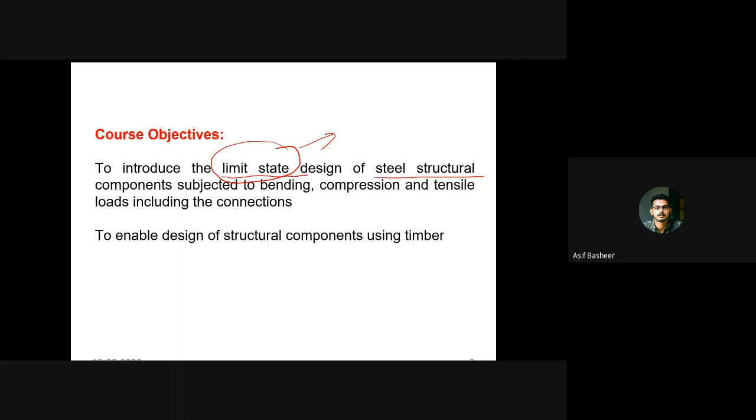So the course objective is to introduce the limit state design of steel structures. You have studied what is limit state, right? We have studied this before in the case of concrete structures. Do you remember that? As per IS 456:2000, we had done the limit state design of concrete structures, isn't it?

So here we are starting the design of steel structures. The same limit state design we are doing here for designing the structure in bending, compression, and tensile loads - to take the bending stress, compressive stress, and tensile load coming on the structure - as well as we are designing the timber structure.

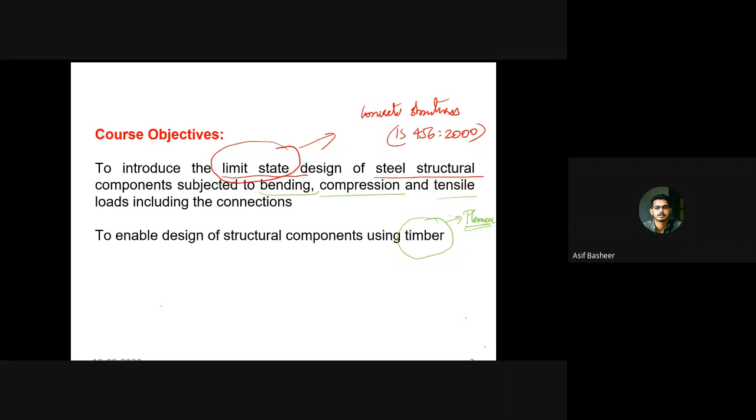For designing the timber structure, we will be designing mainly for flexure only - that is, we will design only the timber beam, and a single problem from column or something will be there. So in your syllabus...

TOS 5 consists of mainly two parts - design of steel structures, as well as design of timber structures. Your four modules will be design of steel structures, and two modules will be design of timber structures. So that constitutes your TOS 5, that is Theory of Structures 5.

A brief introduction to the syllabus: design of steel structures has four modules - module 1, 2, 3, and 4. In that, the first module is the introduction to steel structure.

Whatever things we are going to study - what is the need of this design of steel structure, what is the relevance or use of studying this subject - you will study in this introduction part, along with the material properties used in steel design, and a small numerical type that is the design of welded and bolted connection.

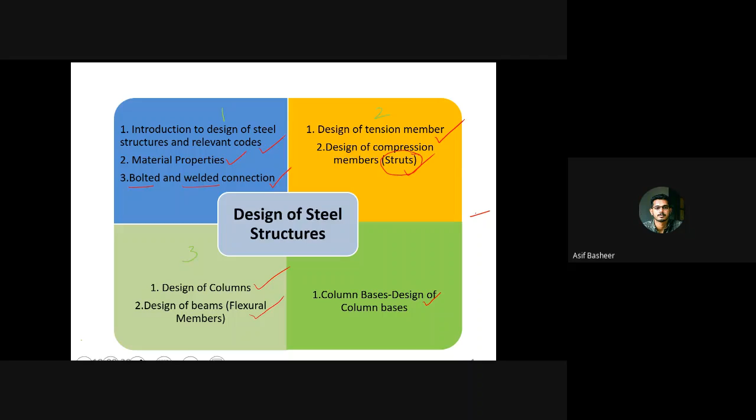The design of timber structures has an introduction similar to what you have seen in steel. You have the introduction to timber structures, then design of timber beams. The last and final module has the design of flitched beams, that is a composite section comprising both steel and timber, and a small portion on design of timber columns. This constitutes your Theory of Structures 5, and I hope it will be easy for you, and I hope you cooperate with me throughout this entire semester.

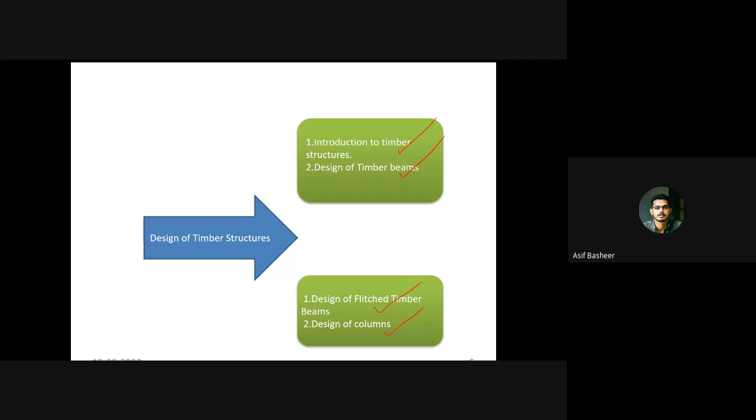Okay, now we'll move to the design of steel structures. We will start with the design of steel structures.

Have you seen steel structures anywhere? Yes. Can you tell me someone, where? In our own department. Which department have you seen steel structure in? In your architecture department, right? Yes, the renovated portion, the new extended portion, right? Yes, yes. Other place in the college, have you seen steel structure? In the auditorium. Very good, in the auditorium you have seen the steel structure.

There you have used pre-engineered structures. They have made the section using plate. Actually it's not hot rolled, it is a plate section. According to the need, we have casted the structure.

Have you seen steel structures in railway stations? There are many from Kannur, Kozhikode, Kochi. So you have traveled a lot in trains, right? The majority of major construction inside the station, the platform, the overhead bridges, many things are made up of steel only. Have you noticed that? Yes sir, many are traveling in trains a lot of times, so you might have noticed. If you haven't noticed, please do see, whatever things we are studying in design of steel structures, you can see in the railway station.

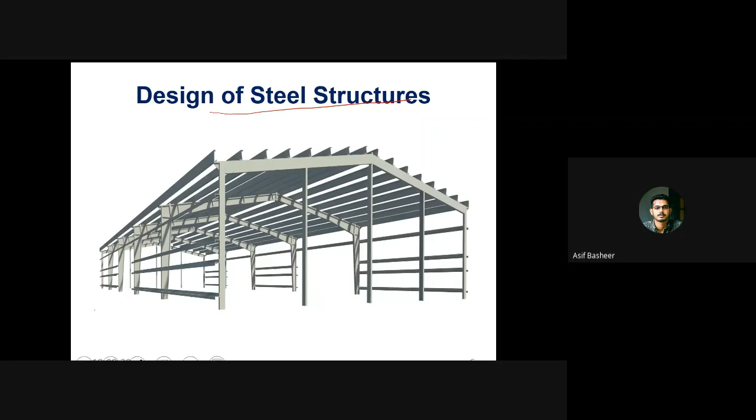That is the different codes you require for design of steel structures. Last time we had IS 456-2000. Here you are having IS 800-2007, that is the General Construction Steel Code of Practice, the steel code, IS 800-2007.

Along with that you require a thing called a steel table. That is, the different types of sections available in the market will be given by a steel table, or there is another given by IS code itself, SP 6, that is Special Publication 6, corresponding to IS 800-2007. I'll give you the PDF of these three. This will be very much useful while we are doing the numericals and all.

Major things regarding the design of the section will be provided by IS 800-2007, and for reference, for taking the different section properties, you can refer the steel table.

The PDF soft copy of this I'll give you, in the Google Classroom as well as in your ET Labs. Either you can take the printout or have the soft copy with you, but any one of this should be readily available with you. I recommend you take the hard copy, because you need to take this to your examination hall. Anyway you need to take it at some point, so take it now itself if possible. It will be easy for you to study.

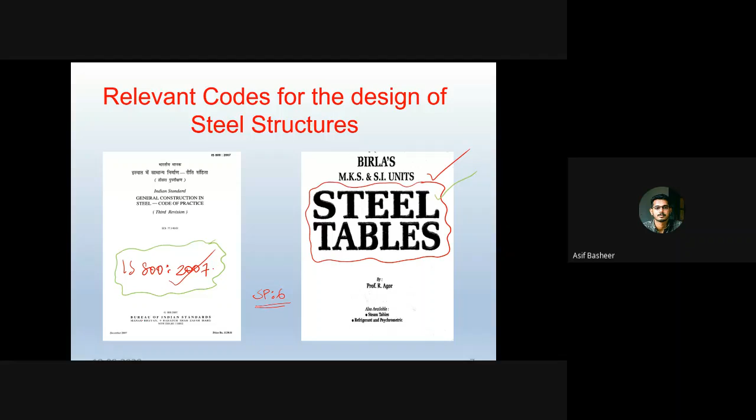And now next is, what are steel structures? So what do you mean by steel structure? Last time what we have studied was RCC. The load transfer takes place through what? The load which you are standing, suppose you are standing on a slab. The load from the slab will transfer to your beams. From there, it will transfer to your columns. From the columns, it will get transferred to your footing. From the footing, it will get transferred to your soil structure, or the base of your structure, isn't it? This is how the load transfer takes place, right?

So there, it was all made of concrete. Now, what is this? We are replacing these things with steel. That is, the load transfer takes place through steel elements or such structural steel. The load transfer takes place through structural steel, and the load bearing thing will be a steel structure. Then such structures are called as steel structure. That is, in steel structure, a structural steel is the main load carrying material to transfer the load within them and to transfer the load to the ground.

Last time we have studied RCC. There the load transfer took place through what? It took place entirely through your RC members, that is a reinforced concrete member. Here, what you are going to see is the load transfer will be taking place through steel sections. So can you tell me what is the difference between the steel section here and this reinforcing steel used there? Is it same?

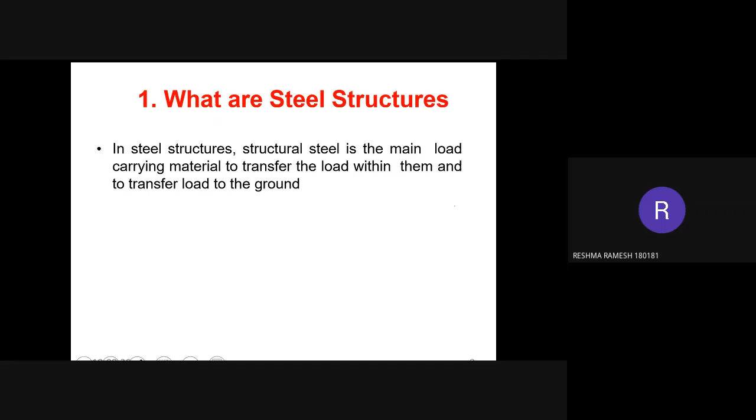No, sir. The other one is no. The other ones were just steel rods. So the difference is that are called as reinforcing bars or rebars, and here the elements or the things what we are dealing with are called as structural steel. See the word structural steel. It is called as structural steel.

They itself will be taking the entire load. The other one is just reinforcing, that is adding strength to your member. It's only the part. It alone cannot take the whole load. It just adds the strength to your structure. It's just reinforcing your elements. Reinforcing means just adding some extra property to your elements. That alone cannot take the load. But here, this element, that is a structural steel, alone can take or withstand the load, type of load which is coming on it. Either it is compressive, or it is flexural, or it is tensile. Whatever be, it alone can take the entire load. So don't get confused with reinforcing bar and structural steel. It's entirely different. The properties also are different.

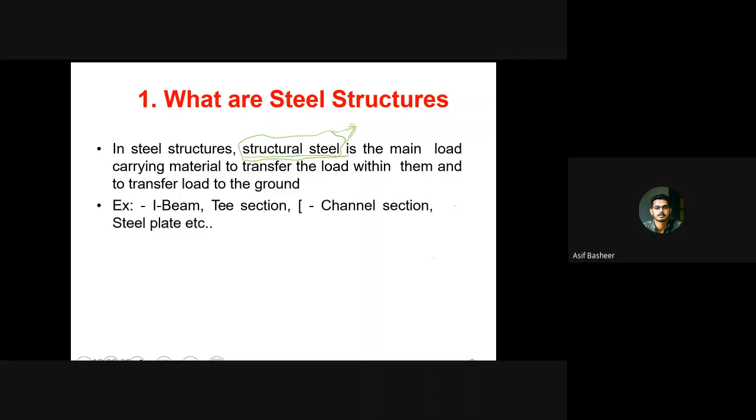Have you seen the structural steel sections? I section. That is I section. You can see I section. This is the I section. That is based on the cross section. Based on the cross section of the elements there are different sections available in structural steel. That is I beam. You can see the I section, I beam.

Then T section. See here the cross section, here the cross section is in the form. Can you see this? The cross section is in the form of the T. Can you see this? Yes, sir. Yes. The cross section is in the form of a T section. So that section is called as a T section. Then there is channel section. See this here, the section is in the form of a C, right? The section, the cross section of the element is in the form of a C. That is called as a channel section.

Then there are steel plates. Solid plates are there. It is simply like a steel plate which will carry. There will be solid plate there. Such sections are available. Okay, these are just few sections. There are different lot of sections in steel structure, and I will tell you what are the use of this I section, what are the use of this channel section, what are the use of this T section, etc.

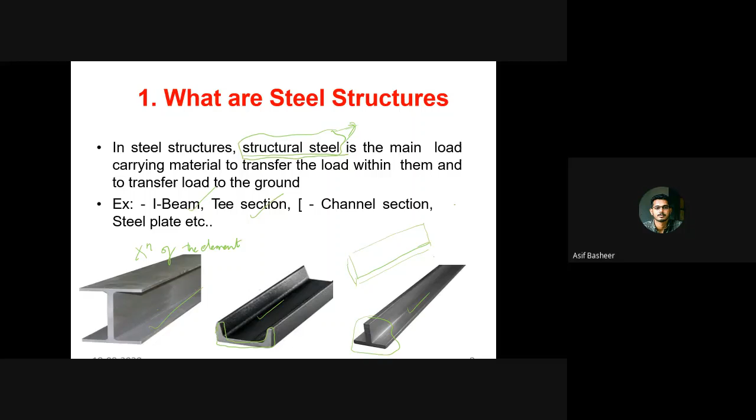Is Mohammed Sain present? Yes sir. Have you seen the same? While traveling through the National Highway, have you seen the Bismi Electricals buildings in Kochi and around? Have you seen that along the National Highway? Yes. Major buildings of those Bismi Electricals are made of these things, that is, they are made of structural steel. I will tell you why they have done that, the advantages of steel.

So sir, there are structures which have both steel and concrete, but our study in this semester will be entirely steel structure alone. There will not be steel-concrete composite structure. Just for information, I told you there are two types of structures, actually three types: steel alone, concrete alone, as well as steel and concrete composite structure.

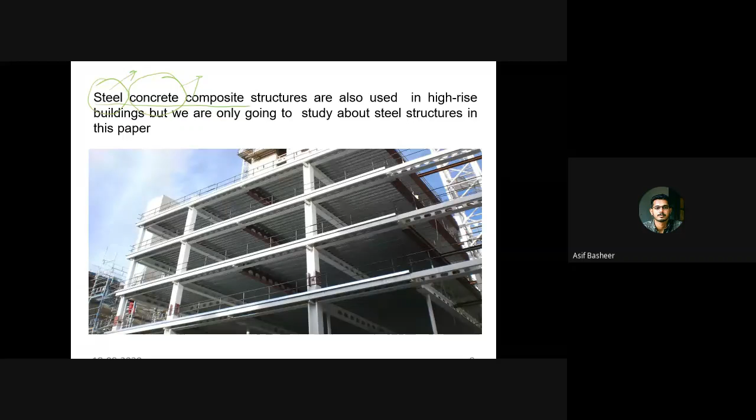Now the common steel structures used: we have seen this in factories, the steel structure used in warehouses, different factories. We are also using steel structure in cinema halls. Why are we using steel structure in cinema halls? Can you tell me?

Is Fatima there? Can you tell me why we use steel structure in cinema halls? Yes sir, maybe for acoustic purpose. Acoustic purpose, okay, that's not exactly it.

Okay, thank you. Have you ever noticed the span of a cinema hall? It will be very large, right? You need to accommodate a large span. In order to avoid columns, if you place a column in between, there will be a view obstruction. The one sitting in the balcony or in between cannot see the screen perfectly. The same happens for an auditorium also, they cannot watch what is happening on the stage. So in order to have a larger span, we go for steel structures, because steel has much higher strength than what?

Concrete. Excuse me, can I ask you one thing? Is there any restriction from my side, any distraction from my side? Students, please respond. No sir. Is there any TV sound? No sir, no, fine. Okay, fine.

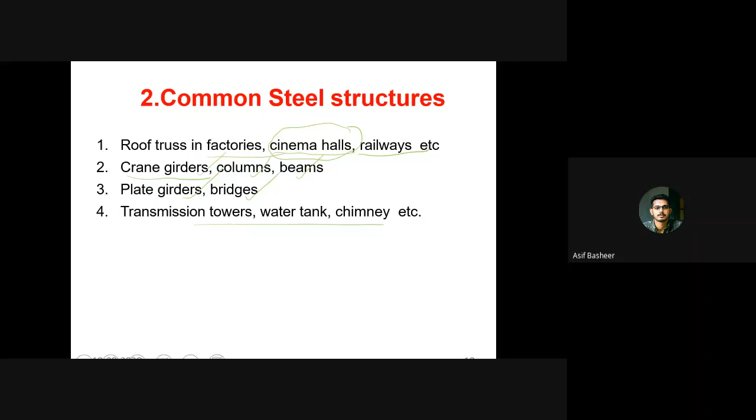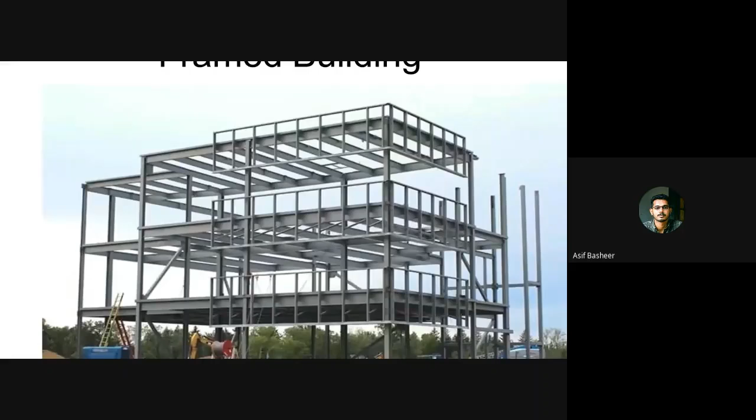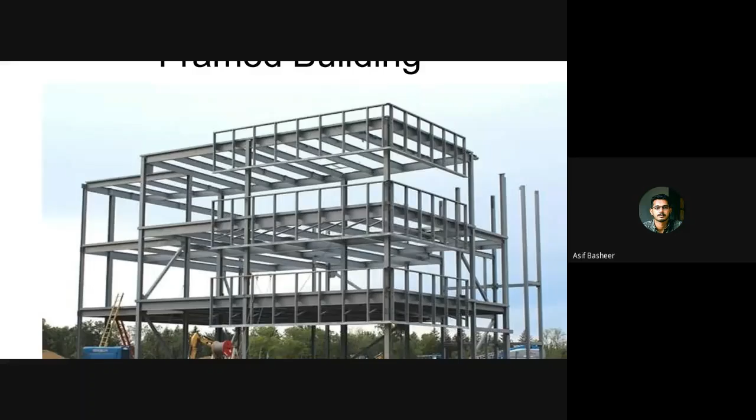So the framed buildings, you might have seen this one, right? Have you seen this frame building? This is at the time of construction. You can see the frame building coming like this.

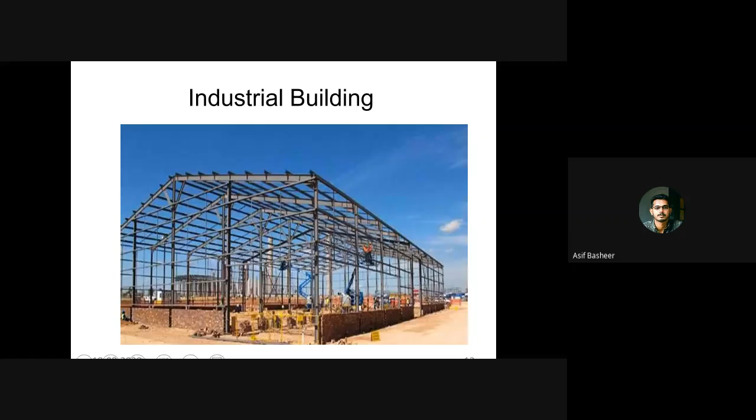The next one is industrial building. Have you seen this kind of construction? Your factories, warehouses, etc. will be constructed with the help of this steel structure. That's what we have studied. See, you can see here your auditorium - the example is your auditorium.

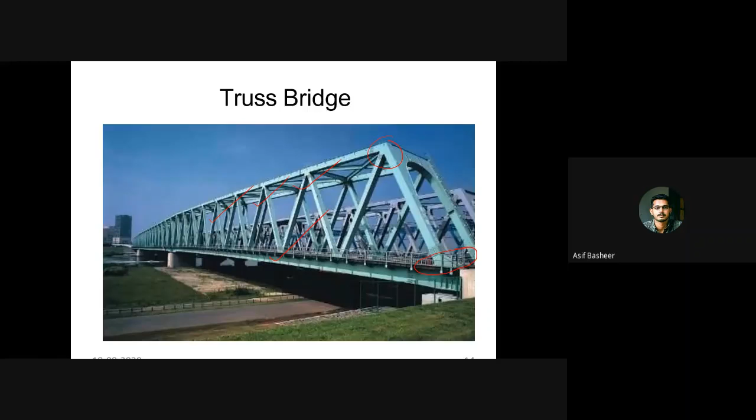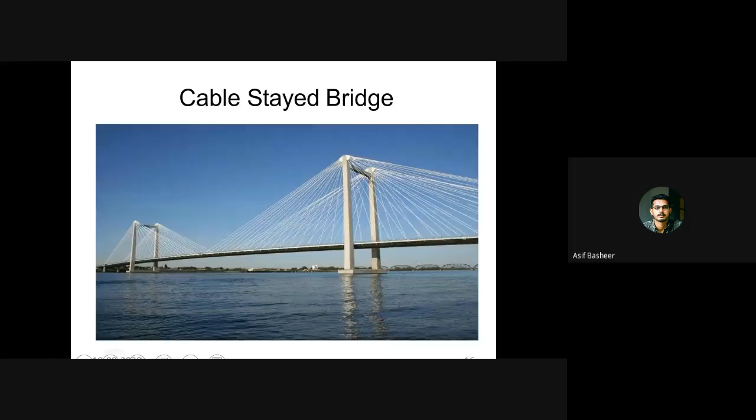And the suspension bridges also, the major thing will be steel structure only. Then cable stayed bridges. Now comes the question of why you are preferring steel structure - that is the advantages of steel structure. That will be explained here.

First one, can you tell me why you are preferring steel structure? Can someone tell me why? It can take tensile force - only tensile force.

Easy to construct, different sections are available, lightweight sections available. It's also lightweight and it consumes less space. Very good - less space. We could also span large areas.

Okay, so we'll see one by one. High strength and stiffness - it will be having high strength when compared to concrete, as well as stiffness. What is stiffness? If I'm applying some load, the load required for unit deflection, that is called stiffness, and that will be very much high when compared to other construction materials. As a result, we prefer the steel section.

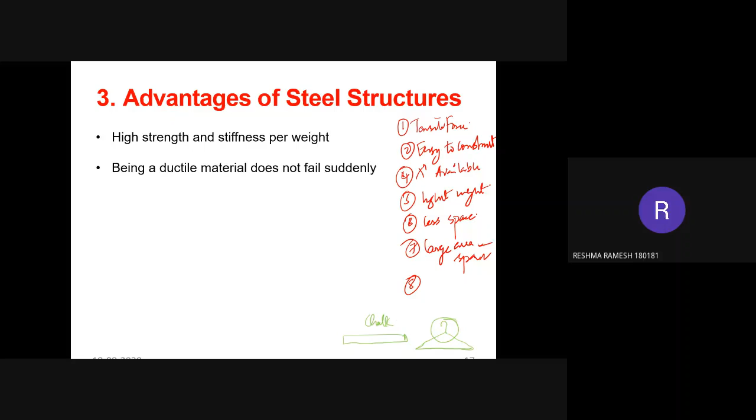What is the advantage of a brittle failure and a ductile failure? We could know, we could at least take some measures prior to the failure. Prior to the failure, either you can do the retrofitting, you can do the damage repair, or you can do anything. Like if there is an earthquake, you have enough time to escape from the building before the complete collapse of the structure takes place.

But in case of a brittle structure, what will happen? There will be a sudden failure. So try to avoid the brittle failure in structures, because ultimately it is the lives of a human being. It's the major thing when we are constructing or designing a building. The ultimate aim is that it should not harm the living beings or animals living inside, right?

So the ultimate thing is to avoid constructing with brittle failure materials. So the advantage of steel is that it is a highly ductile material, and as a result, it is largely preferred for construction. Okay, now mass production.

Mass production means what? It is definitely that concrete is being casted at the site, right? So there are limitations because the amount that can be casted at the site is limited. Very much higher workers are required, laborers are required, many limitations are there, depending on the space available at the site. Different limitations are there in case of what?

In case of concrete. But in case of steel, what is happening? It is actually factory made, right? The sections are made in the factory, which means it can be worked 24/7. There will be a lot of machines, enough space for storing materials, enough quality control, many things will be there. So it is easy to have mass production, as well as fast and easy erection and installation.

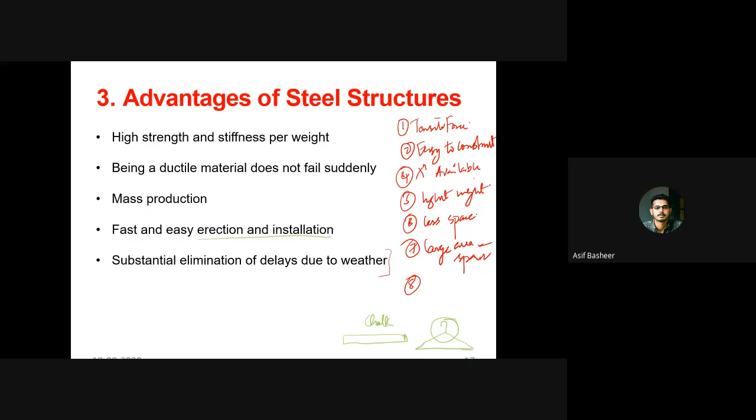The next advantage is substantial elimination of delays due to weather. In concrete structures, rain or snowfall prevents construction since the concrete can get immersed in water. But in steel structures, especially with bolted connections, there is no problem with weather. Such delays due to weather can be avoided entirely in steel structures.

Next, steel is termite proof and rot proof, meaning there won't be any attack from termites or rot. This is also an advantage of using steel structures.

Then there is uniform quality. Since steel is factory made, there will be uniform quality throughout the section, which cannot be assured in concrete structures because they are cast on site. It depends on the mindset and physical behavior of the labor, and on the material being used at the site, which might vary. But since steel structures are factory made, you can assure larger quality control and uniform quality throughout.

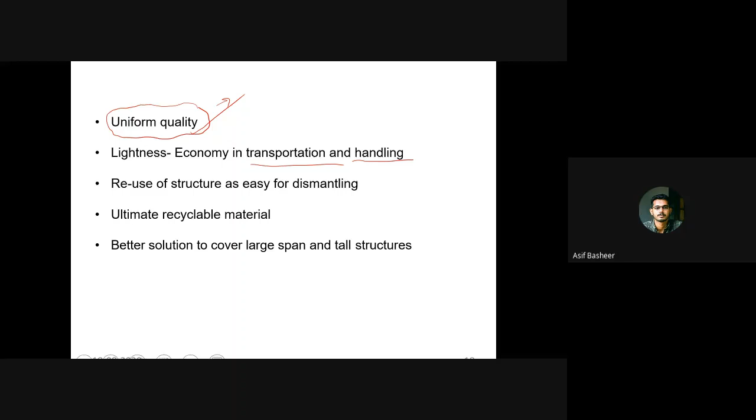Then lightness and economy. Steel is lightweight, which gives economy in transportation. Its lightness and smaller size make it easy for transportation, handling, and construction, and requires less space.

Then there is reuse of the structure. If it is a bolted structure, especially for temporary construction, reuse is very easy in steel structures, and it's easy to dismantle. In concrete, you need to destruct it, so there is no reusing of the structure.

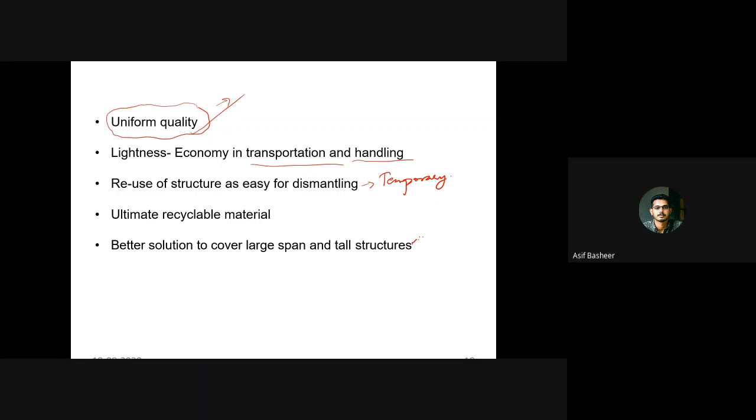Then it is a recyclable material. If properly taken care of, steel is highly recyclable. You can shift it from one place to another; it is reusable and there is no problem in that.

Then it is a better solution to cover large areas and tall structures. It is very easy to cover large span areas, like in cinema halls, auditoriums, etc.

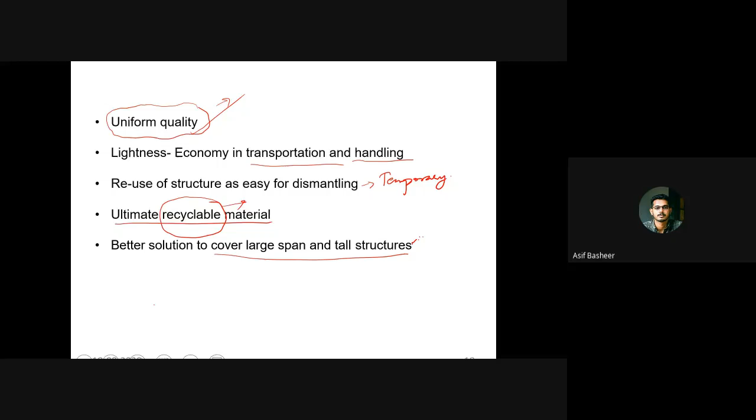Definitely there will be some disadvantages also, but the major thing is the advantage. But in Kerala and in India, we see very much less amount of steel structures. Have you ever thought of that? Recently there are many steel structures, but around 5 to 10 years back, there were not much steel structures seen in Kerala or India. Have you ever thought of that? What is the reason for that? Can someone tell what is the reason for that?

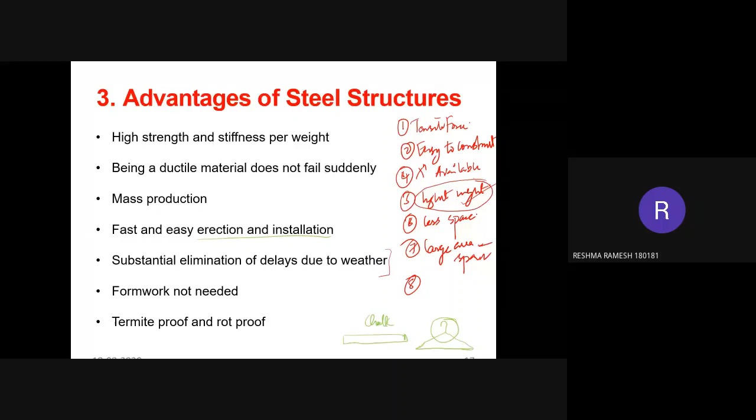Maybe the production was not that much earlier. But production is there - there is Tata, there is Jindal, there is Vizag, many are producing this steel. That is also one thing though - after 2020 they started production of structural steel. If there is no use, then there is no need of production, right? That happened in case of structural steel. I am asking why there was no use.

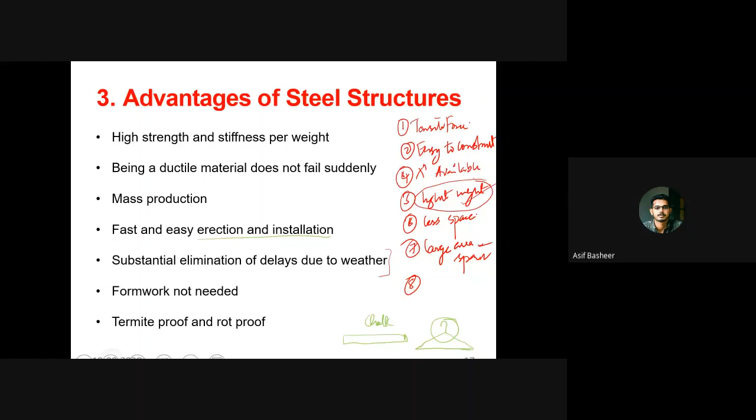So here comes the disadvantage of the steel structure: it's open to corrosion. Have you seen the buildings, structures, vehicles near your seashore? Have you noticed what's happening there? It is prone to corrosion, right? There is rusting of the structure. If not properly maintained, the structure is very much prone to corrosion.

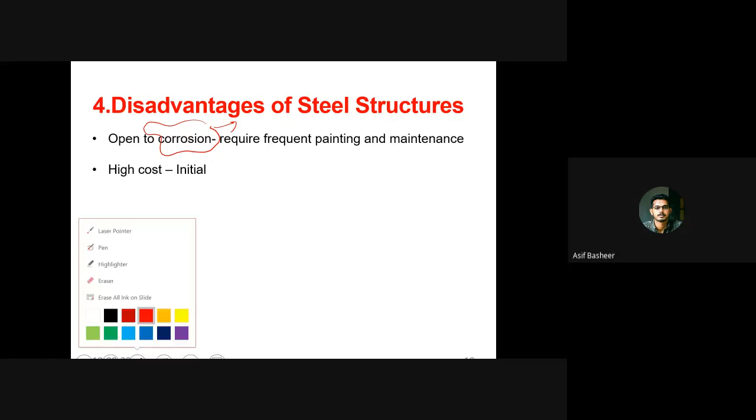The next disadvantage is high initial cost. In India, there is less use of steel structures because the initial cost is very high. It is very difficult, as an architect, to make clients understand that although the initial cost will be high, it will be aesthetically very good and will save a lot of energy like light, electricity, and many other things. But convincing them is very difficult. Nowadays it's a bit easier, but still convincing them is difficult.

This happened a few years back in India—it was the initial cost that made many not use steel structures. When planning new construction, if the initial cost is very high, they would simply reject it due to cost. But nowadays they reason that even though the initial cost is high, the revenue generated will be much higher compared to the initial cost, so they go straight with steel structures. There are many advantages to steel structures.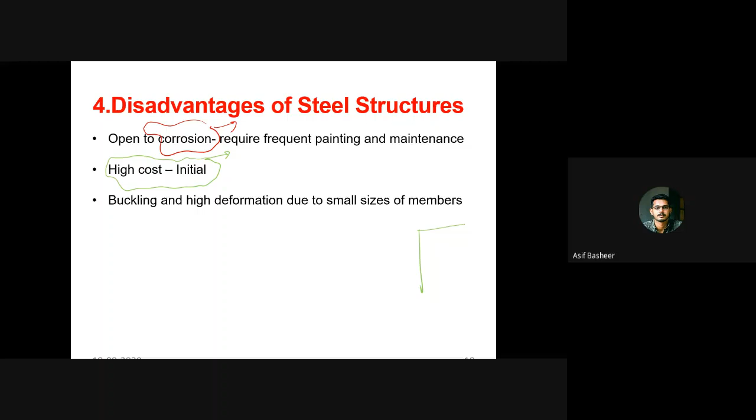Next is buckling and high deformation due to the small size of members. As the thickness of members decreases, what happens? Suppose you have a column made of concrete, and a similar column made of steel. This concrete column has a tendency to fail by crushing.

But here, besides crushing, there is a tendency for the steel column to buckle—this is called buckling of the column. Thin members, rather than crushing, have a tendency to buckle. If you're using small members, there is a high chance of buckling and high deformation—this deformation is called delta. There's a high chance for deformation to occur, which is why we try to avoid it.

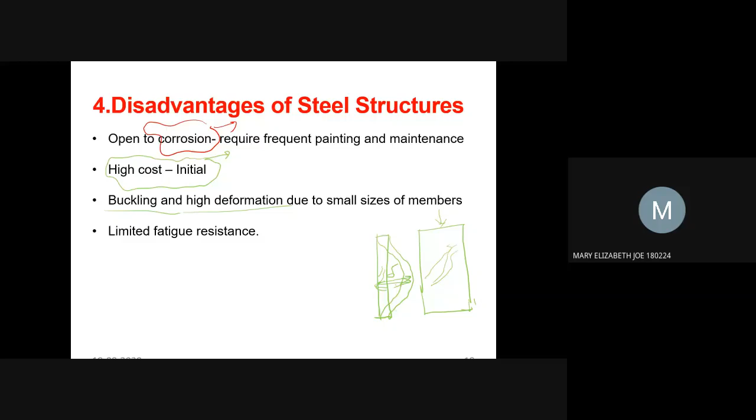A student asked: Sir, despite this buckling problem, in Western countries almost all high-rise buildings use steel, right? So why don't they have this problem? The instructor replied: I mean, they too have the problem.

They use sections which are not prone to buckling. The design may indicate they need a section of around 300 mm width or depth, but they use somewhat higher sections so that buckling is checked for, even though the section becomes highly uneconomical. The required strength needs only a 300 mm section, but due to the buckling factor, the section required will be much higher than the required load-carrying section.

So they are prepared to spend more money—yes, definitely. You'll understand this once you're out of college and dealing with a foreign client: they don't look for money. You can see this in buildings in the Middle East and elsewhere. The actual cost of construction, without the aesthetic appearance, would be much lesser. If you go for aesthetical beauty or appearance, it costs 1.5 to 1.7 times higher than the actual cost of construction. They won't look for money, especially for high-rise structures, because they want to get attraction too.

So the next point is limited fatigue resistance—that is what is meant by limited fatigue resistance.

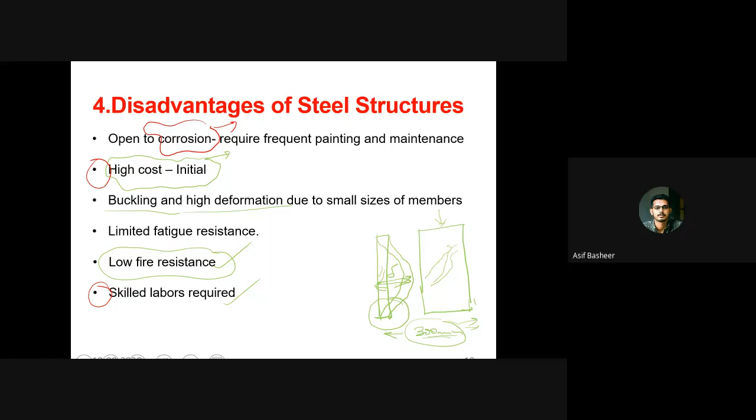Okay, it's 11:17, we'll see. Next, the properties of steel, that is the properties of a section, as you can see in IS 800 2007, clause number 2.2.4.

It's written there that the density is very much high. What is the density of the concrete used? Can you tell me what is the density of the concrete? Suppose it is 25 FCK, what will be the unit weight of the concrete? We have studied this last semester.

Definitely the strength will increase, right? It's having high strength. For 1 meter cube, it is having 78.5 kilonewton, or 7,850 kilogram. At the same time, concrete is having only 2,500 kilogram per meter cube. Understood? And the Young's modulus is also very much high.

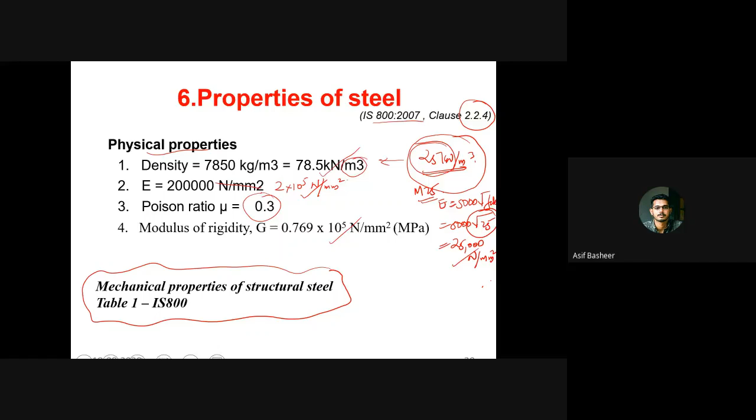Steel sections - there are different types of steel sections available. What is the time now? 11:20, fine. Can I continue for another 5 minutes? Is it okay? Yes sir. Yeah fine, so the next is the steel sections.

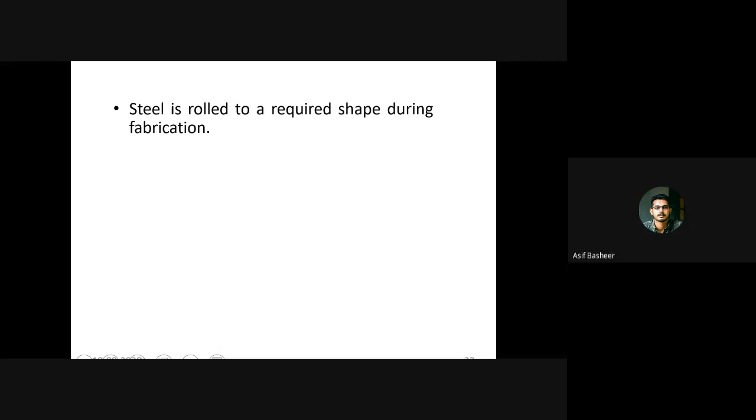Next is the commonly available steel structures. I section is available, then T section I have shown you. Channel section, then angle section is there, angle section I will present like this. Then there are steel bars, tubes, plates, sheets, strips, etc. So these are the different types of structural steel sections available.

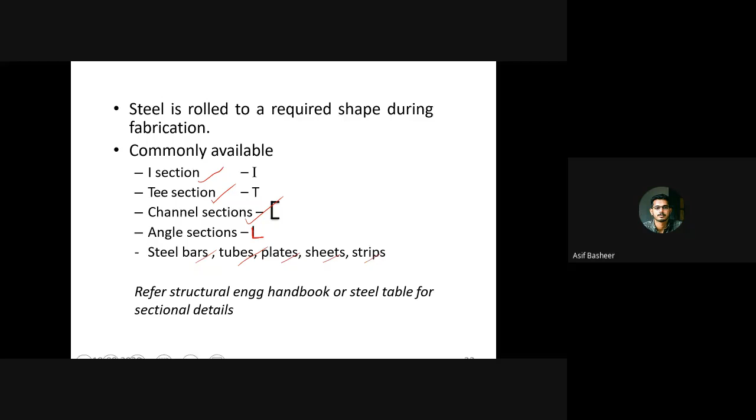We'll come to each one by one. First, I told you one book is there, IS 800. Along with that, there is one steel table. You can see the properties of all these sections - the density, the different dimensions - in this steel table. You can refer to the steel table to see the different sectional properties of the section available.

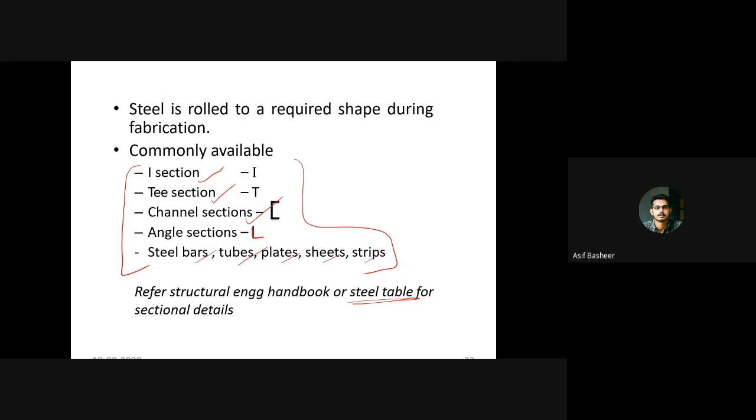Then there is channel section - it will be in the form of a channel, that is called a channel section. Now first one, that is the I section.

I section - there are different I sections available based on the flange width, based on the thickness of the flange, based on the thickness of the web, based on the width of the web. There are different I sections available.

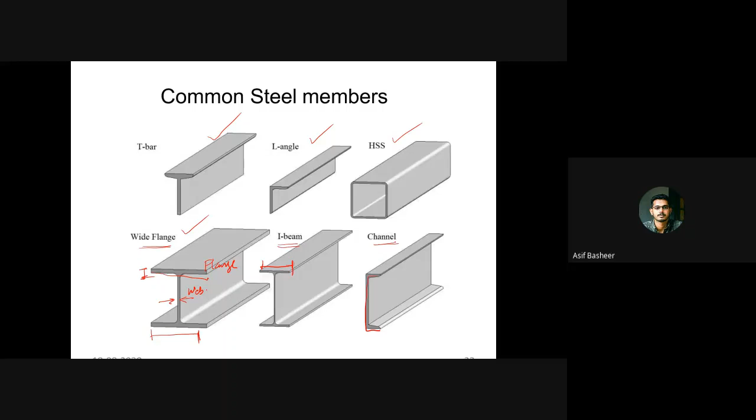There is Indian Standard Junior Beam Section, ISJB. Then light beam section - that property we will study later. That is Indian Standard Light Beam Section, Indian Standard Medium Beam Section, Indian Standard Wide Flange Section, and Indian Standard Heavy Beam. So these different sections have different uses - some will be used in design of columns, some in design of beams, etc. So the designer has the choice of selecting which kind of section to use.

But there are some guidelines you should follow - for columns you should use this one, for beams you should use this one. You will come to know that in the coming modules. So if you have any doubt, you can ask me now, or if it needs to be clarified in the coming modules, I will tell you then. Otherwise I will explain. Have you got any doubt up to here? Is there any doubt?

No, sir. No, sir. Yes.

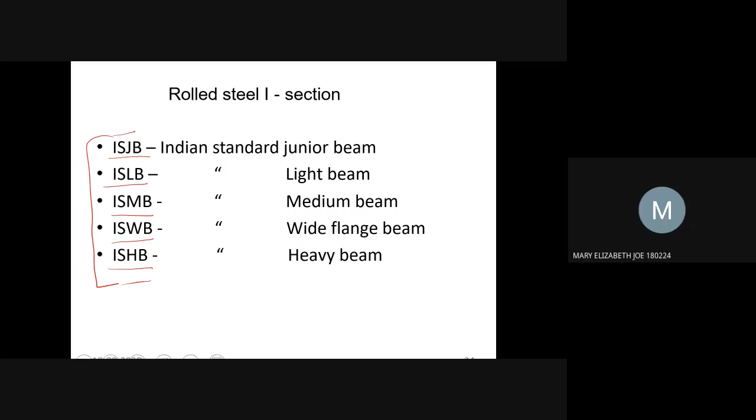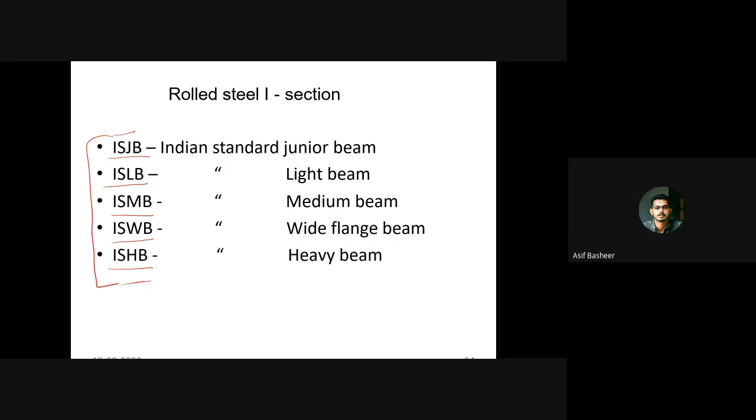Okay, fine. Next is how these will be represented - ISJB that is junior beam, light beam, medium beam, wide flange beam section, heavy beam - all will be represented in this form, as ISMB 500, for example.

It will be represented like ISMB 500 at 0.852 kilonewton per meter. This 500 represents the total depth of the section in mm, and this 0.852 represents the weight of the section per unit length - that is, if I am running the section per unit length, for 1 meter, then what is the weight of the section, that is 0.852 kilonewton per meter. So this is how the representation is given in your IS code.

So if you see the IS code, you could see ISMB 500 at 0.852 kilonewton per meter, which means from here you will understand the section is Indian Standard Medium Beam, having total depth 500 mm and weight 0.852 kilonewton per meter. Are you able to understand how to read the section details? The first one defines the total depth, and the second one defines the weight per unit length of the section. Is it okay?

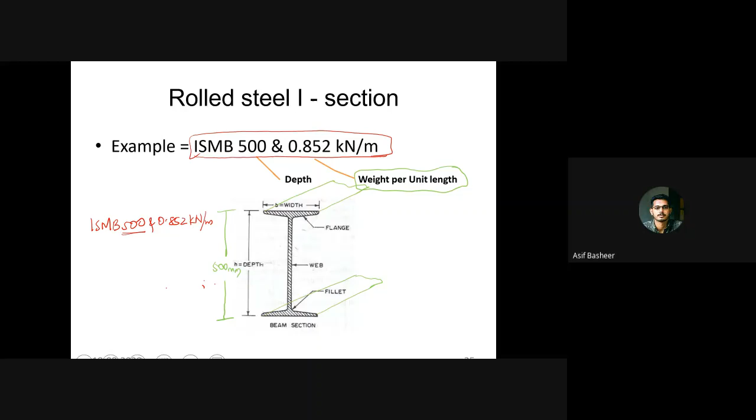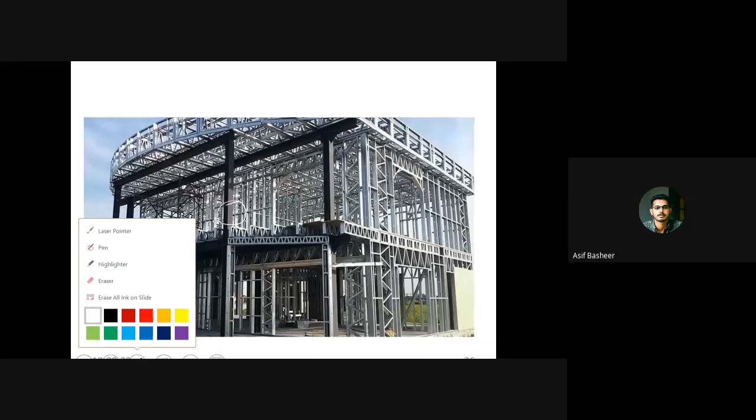Then the I sections are used here. You can see the I section which is being used all over here, and here the I section is used. Similarly you can see the I section used as a beam. The I section is used as a beam here, and here it is being used as a column.

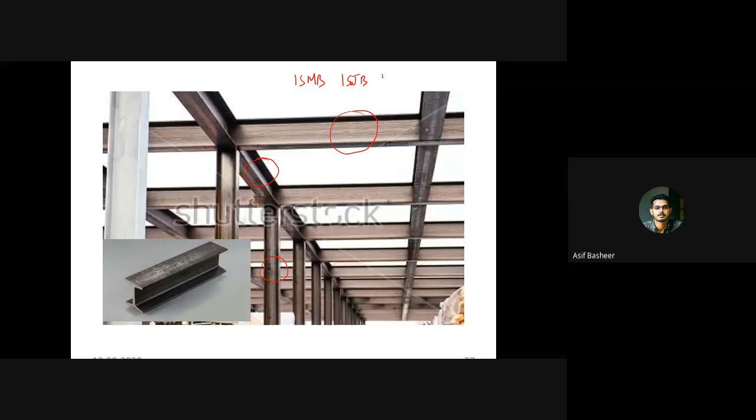You can see the different use of I section. This section will be either ISMB, ISJB, or ISHB, depending on the design requirements. So it is being used for beams and columns majorly.

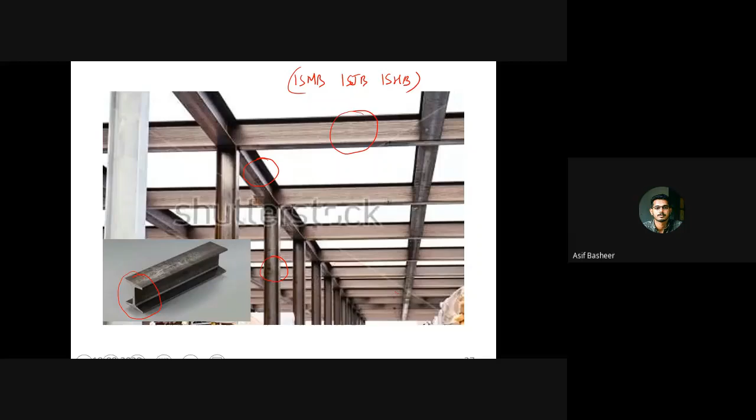See the I section used, you can see the small part of this. This is I section being used. See here, this is I section used as a beam. This is an I section used as a column. This is an I section used as a column. This is the I section used as a plinth beam.

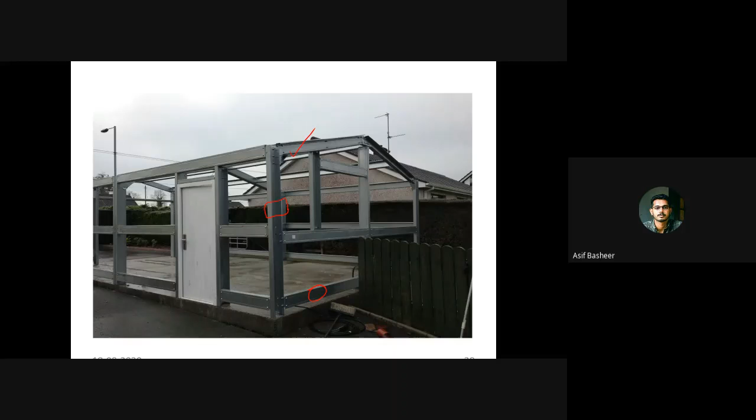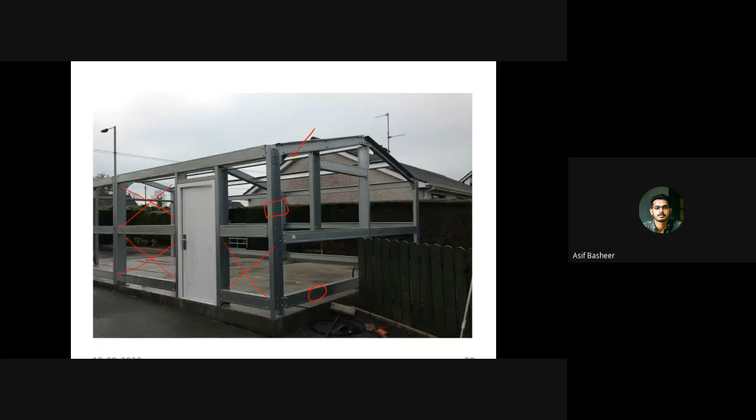This is a bracing actually. The wall will be constructed in between this portion, if required. This will provide the frame structure, the whole thing will be acting as the frame structure. This will be the load bearing entity of the structure, and the partition will be provided by some wall materials.

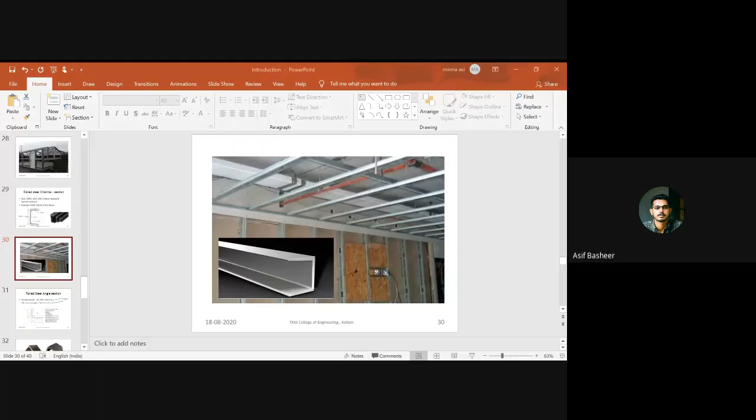So was it okay for you? Were you able to understand this mode of teaching? Yes sir. Was it okay for everyone? I think all are present, right? Almost everyone is present, so we will stop here.